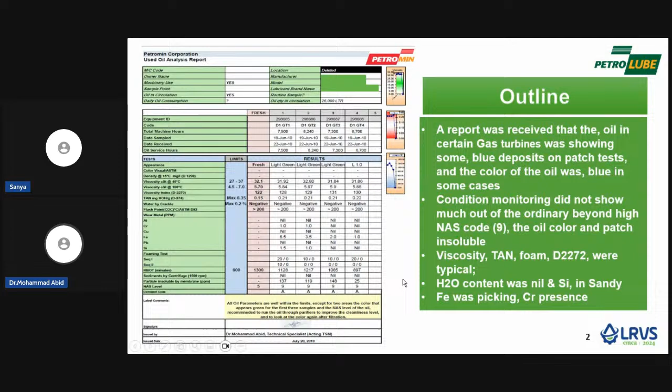We found the reason for this blue color. Initially, I thought this bluish tint was due to copper or something, but there was no copper in the solution. You can see some of the internal parts of that turbine, how it looked at that time.

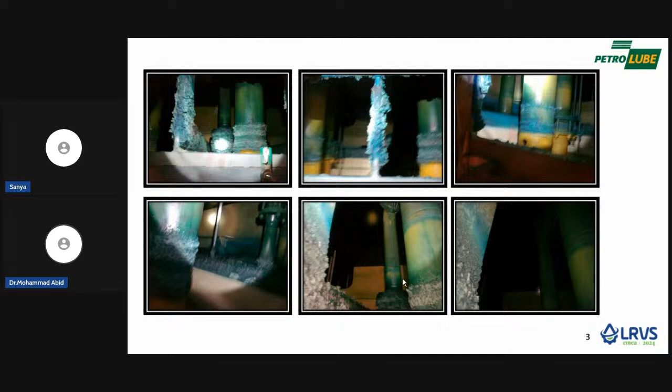It was mid-2010 in one of the biggest power plants in the central region. We worked on this along with General Electric. Since all this data I'm presenting is based on trust, it is not patented or our property, but it is a joint effort, and we achieved something at the end. So I'm sharing with the audience how, if we do a systematic analysis of a customer complaint, we can gain some beneficial insight.

Here you can see the problem: the turbine received gradual losses of pressure in the hydraulic system. All the valves got choked and some pressure issues came up.

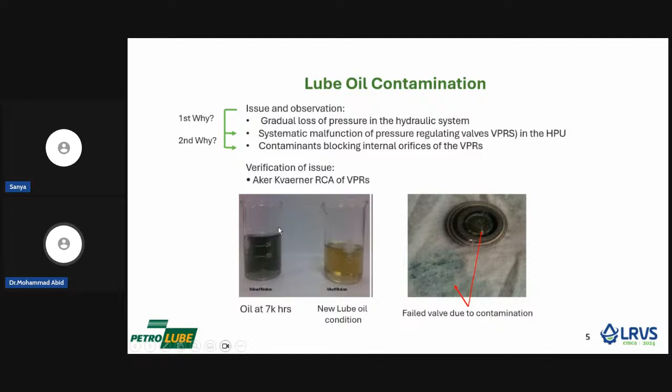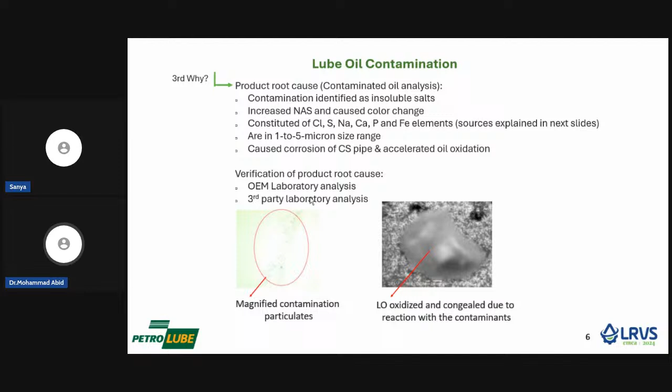In this slide, you can see the supplied oil color, which is the new lube oil color, and at 7,000 hours, something like 10 to 12 months of operation, the oil turned bluish. We took some high-tech analytical chemistry help to analyze the varnish or sludge particles, and the root cause was a contaminated gel, a hydrocarbon product formed due to varnishing.

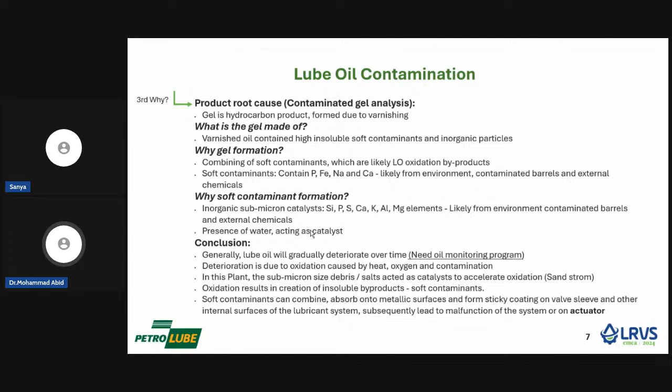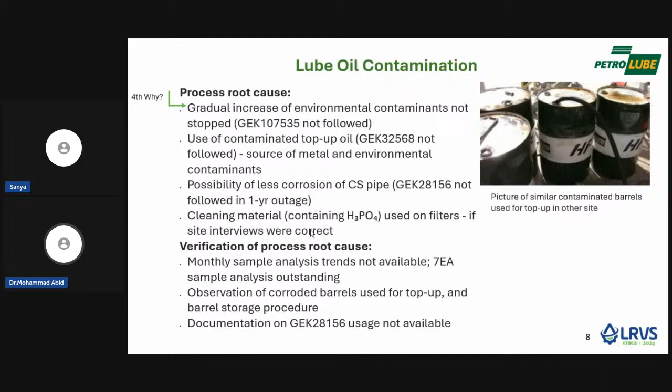I will not go into all the details, you can have them in the slide pack after this presentation. We are again the first company producing Group 3 base oil since 2006. We started importing Group 3 base oil from S-Oil, which was partly owned by Saudi Aramco at that time in 2005-2006, and is now 100% owned by Saudi Aramco, with the refinery in Onsan port, South Korea. We are the first to produce high-level turbine oil within the Kingdom of Saudi Arabia since 2006.

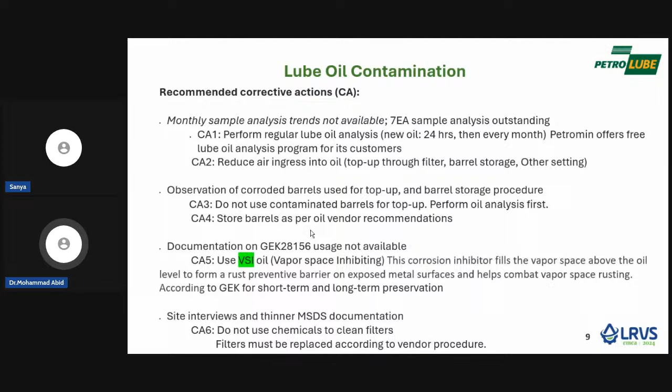In this presentation, we are mainly suggesting corrective action and preventive action due to an unwanted issue which happened. We had a total investigation of 125 bullet points, but I just captured 25 here. Out of that, the used oil monitoring and its interpretation is the key to this success story.

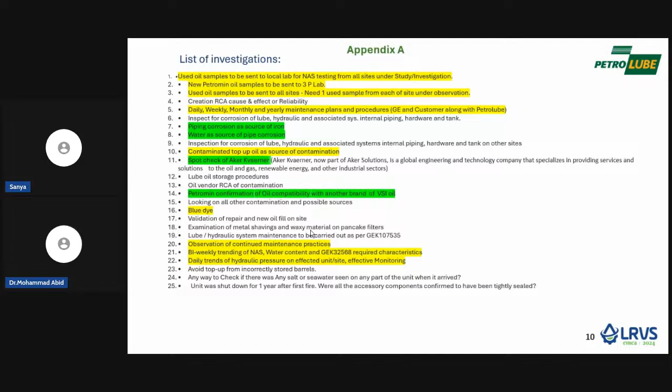One of the main issues in this subject was a bluish color. We were asked to help identify the cause of the problem. We had never heard of this problem except in a case with an Alstom turbine, a 400 megawatt steam turbine here in the western region, where we had blue issues in the turbine oil color, which I can show you at the end of the slide. But that blue was due to a different reason for the oil's color.

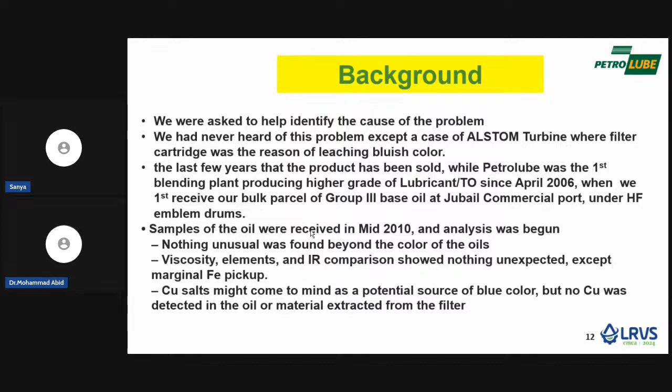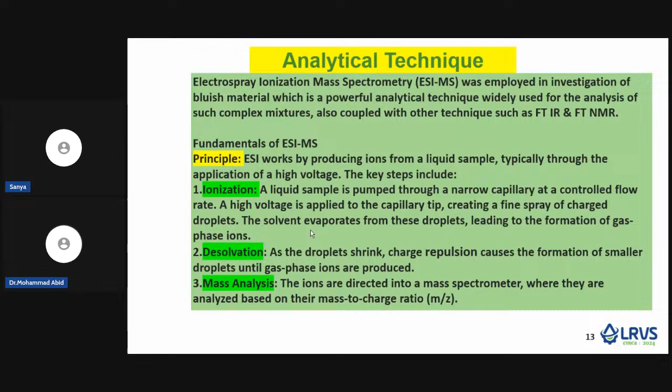In the last slide, we analyzed the fine particles using electrospray ionization mass spectrometer, and also used FTIR and Fourier transform nuclear magnetic resonance spectroscopy to characterize the structure elucidation of this organic compound, which was formed inside the turbine due to weak acid remaining. We found that often the big equipment is cleaned at a pre-commissioning stage, commissioning stage, or hydro testing stage with chemical cleaning.

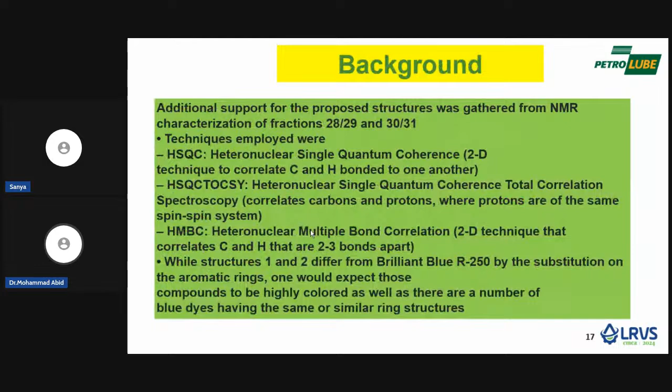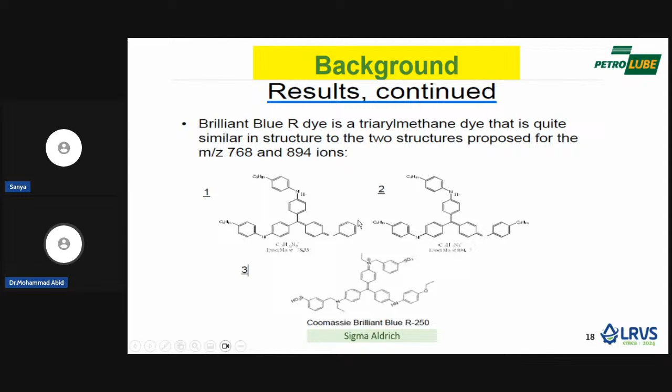Often oxalic acid, succinic acid, or some other weak acid is being utilized. So we were able to develop some compound in the lab, and this is the top two structures. You can see what we were able to understand - this Coomassie Brilliant Blue dye is produced by Sigma Aldrich. People with a strong chemistry background know this dye is available in the commercial market. What had happened is that due to that weak acid and some of the antioxidant in the oil, it formed a similar molecule which shows the blue color.

Alkylated diphenylamine are commonly used as antioxidant because we were using a chemistry at that time based on Lubrizol's different package. You can see here that diphenylamine, when reacting with oxalic acid, produces some structure which was in the blue color. So we were able to find the root cause through this dedicated study.

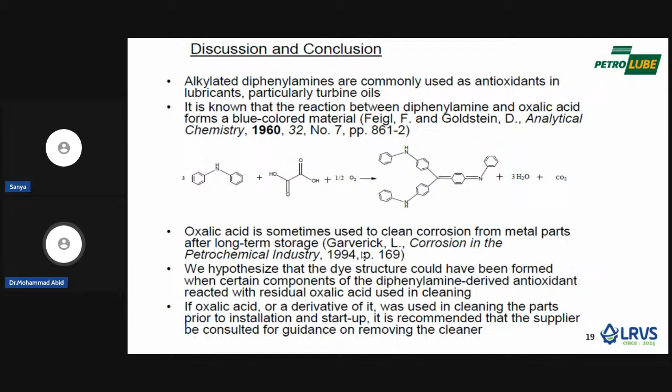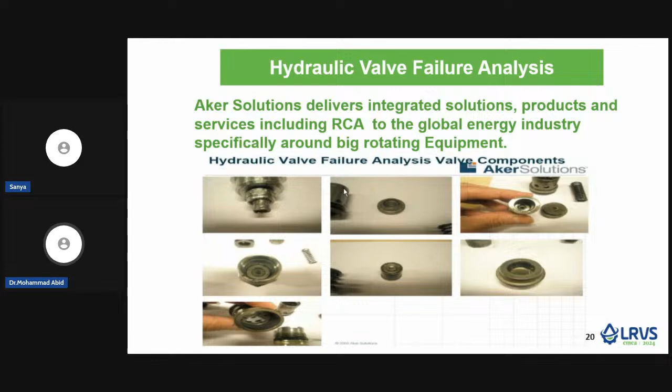We also engaged one of the companies which is providing a very specific solution for mechanical integrity - Aker Solutions delivering integrated solution products and services including root cause analysis. It is all mechanical, I am not involved in this thing, but the whole study had two sides: one is the chemical investigation, where I was directly involved, and the mechanical investigation.

The problem statement: the affected site reported a hydraulic pressure unit problem due to a suspected issue with a sun cartridge valve. All these fine blue varnish particles were the reason for malfunctioning of this gadget. In conclusion, contamination was undoubtedly the source of failure of these hydraulic valves. Foreign contaminants restricted the orifice and interfered with the flow mechanics, preventing the valve from proper operation.

Here I would like to tell only one thing - this is a conventional base, but nowadays artificial intelligence has come in. Not a similar issue, but we were also selling this oil to the military.

When we supplied the oil to this turbine, it was NAS 5, 6. Over time, when we received the sample after 10 or 12 months, the NAS had reached 9 and 10. So we concluded that we need short interval turbine oil monitoring, rather than waiting for a long term before this deterioration happens.

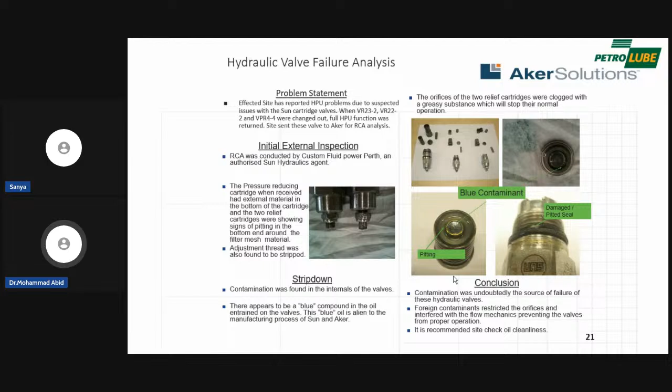In the combined military workshop where we had the simulator, we found an instrument that was broken, with a small particle from the wear metal. One can also find which source this metal is from, which part - whether it's from a bearing, a shaft, or something else. Nowadays the analytical technique is far more advanced, which can help in the instrument operation.

But nowadays, thanks to the instrument we had from Flutech - I would like to thank Flutech for this seminar also - we are now regularly monitoring our remaining antioxidant in our supply turbine oil for the sites, and we can gauge the situation at a much more advanced stage.

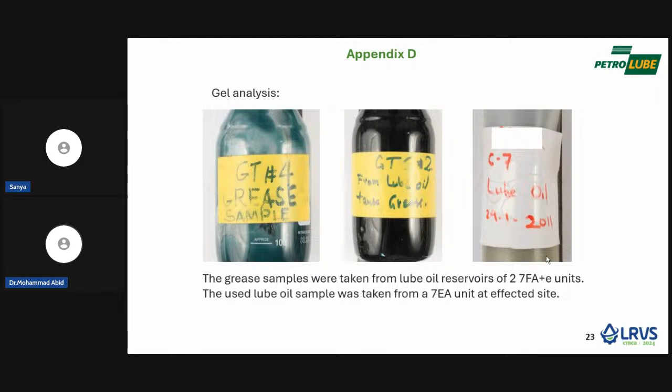This slide shows this greasy, gooey type material from the turbine filters. You can see the left side is green, and the lube oil supplied had a fairly color of less than 0.5 as per ASTM D1500.

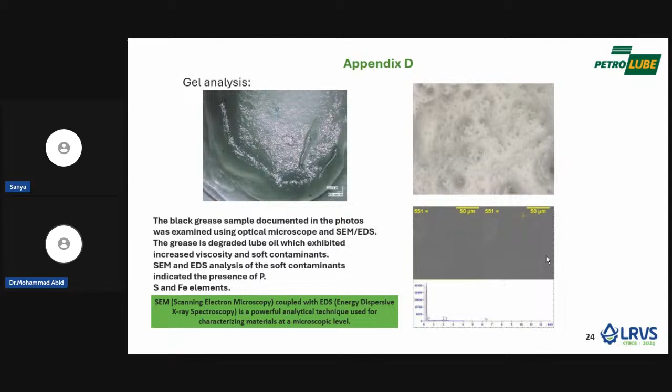This slide shows again some scanning electron microscope imaging, which we carried out in the US for this study, which again proved what happened in the oil due to some misoperation.

In the last second line, the resulting loss of power was primarily due to the deposition of the pigment and the insoluble salt, aided by the gel's ability to allow the mixture to be entrapped on the valve, pressure regulator orifice, stick on valve sleeves and other surfaces, leading to system malfunction.

We have also found that ill practices and non-compliance with procedures specific to GEK's reference maintenance program was not followed unfortunately. So it was also the reason, which I mentioned earlier.

The blue color was formed due to the weak acid and antioxidant reaction, which only proves how this blue color is achieved or formed.

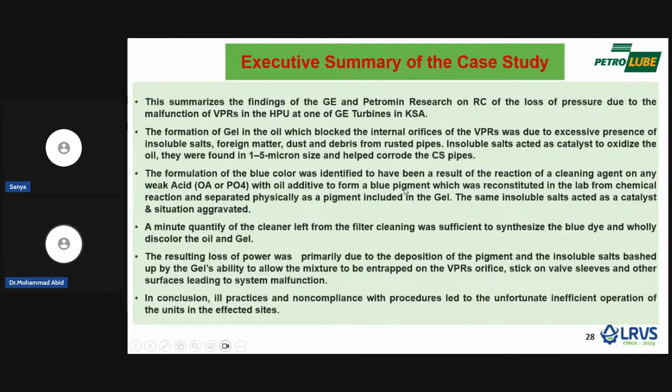So in conclusion, turbine oil monitoring has three parts. Oil condition is one part. Often people are only doing this thing: viscosity, RPVOT, VI, TAN, demulsibility, foaming, air release value, flash point, pour point. But oil cleanliness is greatly affecting performance. In the last two decades, research papers published on this say that 85% of malfunctioning in any big rotating equipment is due to contamination or oil cleanliness, which can also be checked.

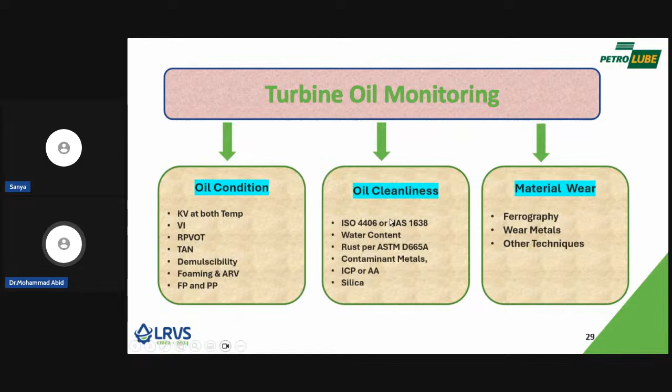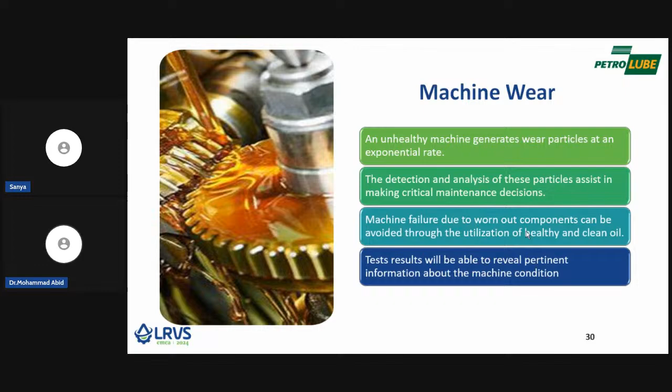Material wear is the third part, which is also important to monitor. A healthy machine generates wear particles at a linear rate, since the oil has a finite life, giving a linear relation for machine wear. But if something goes wrong, then wear starts increasing exponentially, rapidly, like a parabola or hyperbola.

So the method of monitoring is laboratory analysis, which we are doing in our Riyadh plant and Jeddah plant. We are operating three plants, by the way. One plant is in Jebel Ali, Dubai, one is in Jeddah, and one is in Riyadh.

And we do have a mobile lab within the kingdom. One is in the eastern region, one is in the central region, one is in the western region, to support critical customers for all B2B, where our mobile lab has some instruments and we immediately rush to the site where this problem is, and then we send back the sample to our stationary lab.

This is one of the second last slides. You can see this is the Alstom, but I did not focus on this. Here again, you see on the left side, our oil was like this. This is the story in year 2006 or 2007.

Our oil, after certain hours, maybe 6,000 to 7,000 hours, turned bluish. When I visited with my team at that time, we immediately found the culprit was in the bucket-type cartridge filter. These plastics or something on the filter were the reason for the blue color.

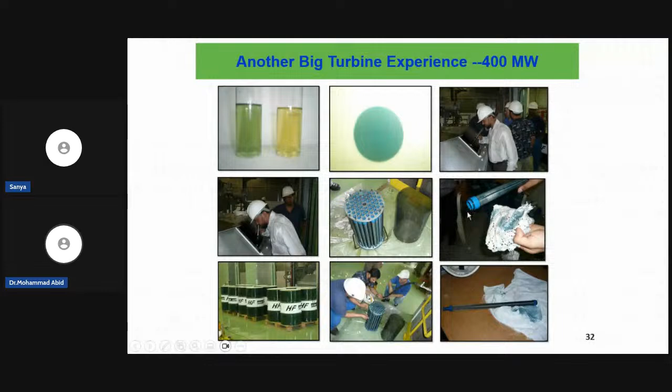The blue color was leaching from there, and then we explained this to the people from Alstom for this turbine, and we addressed the issue because the total acid number in the turbine oil, due to this antioxidant, is sometimes 0.1 to 0.15, so it might affect the plastics. So it was good input for the manufacturer also, and they revised the specs of the cartridge.

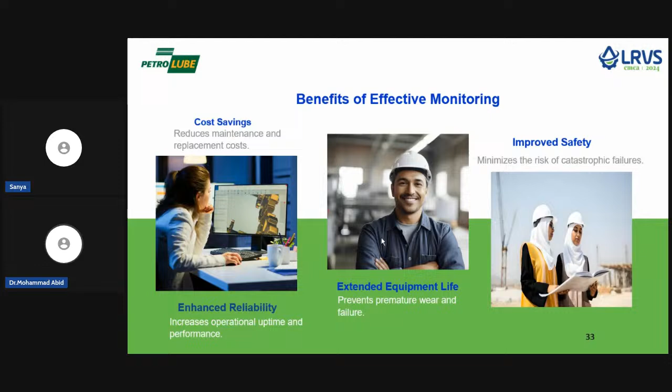With this, I'm just presenting that professional and dedicated used oil monitoring will enhance and help everything. And not only safety, it extends the equipment life, reliability is greatly affected, and it saves cost.

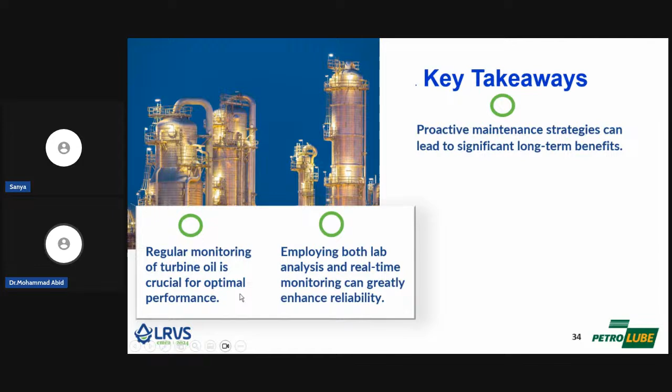So this is the takeaway point for the attendees. Proactive maintenance strategies can lead to significant long-term benefits. Employing both lab analysis and real-time monitoring can greatly enhance reliability. Regular monitoring of turbine oil is crucial for optimal performance.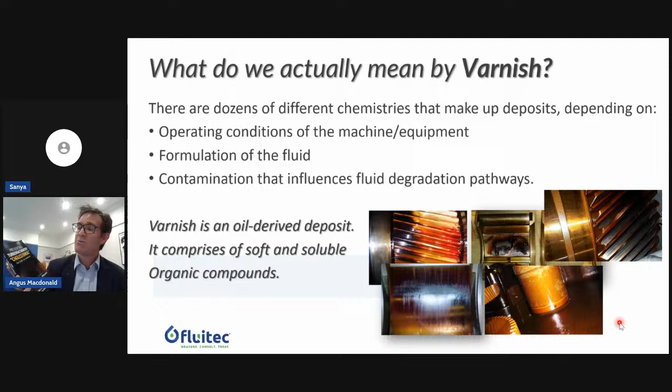As you can see with some of these images here, taken from a variety of applications around the world, it tends to be a kind of brown, orangey, sticky substance you can see on these gears, on bearings and in these reservoirs. But if you want to know more and understand more about varnish, there's a fantastic book published last year, 'Preventing Turbo Machinery Cholesterol, The Story of Varnish.' It's got absolutely everything you need to know about this subject.

In terms of the benefits of being ahead of the varnish problem, it certainly pays off over time. We've got a couple of snapshot examples of just how significantly varnish can impact businesses.

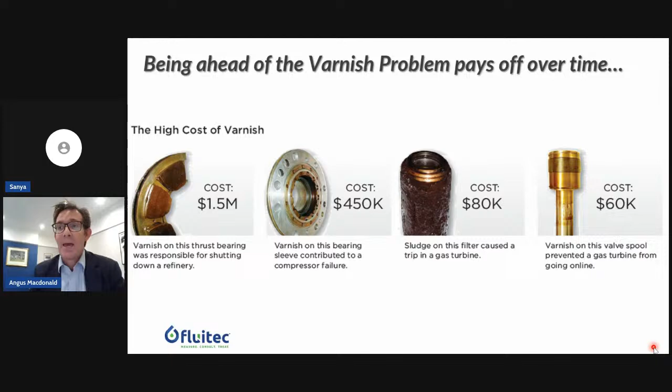So starting on the left, $1.5 million - that was varnish on a thrust bearing that shut down an oil refinery. Nearly $500,000, again varnish on a bearing, which contributed to a compressor failure. This time, sludge on a filter which caused a gas turbine to trip out. And then finally, even up to $60,000 for varnish on a valve spool that prevented a gas turbine from going online. So it really can have significant impacts on maintenance and operating costs for a variety of applications.

So a bit of background about what Fluitec does as a business. They have a synergistic suite of products which align with the Fill for Life concept.

There are four main areas. Firstly, the expertise, which includes LRVS, where we are today, in fluid learning. Secondly, and really importantly, is condition monitoring. The Fluitec team helped develop a number of key ASTM tests, a couple of which I will discuss in more detail today, including the MPC and the RULER. Dr. Abid mentioned the RULER in his last presentation, and they were designed to help monitor in-service lubricants, whether it's turbine oils, hydraulic oils, gear oils, etc.

Thirdly, Fluitec also developed a range of solutions for contamination control, which focus specifically on filtration that can safely remove varnish, using a unique, innovative gel resin type technology to help decontaminate systems. That's the Vita ESP. And then finally, and most recently, a range of life extension products, technologies used to flush or remove varnish, as well as re-additize and rebalance in-service lubricants, which could be turbine oils, hydraulic fluids, compressor oils, or even gear oils.

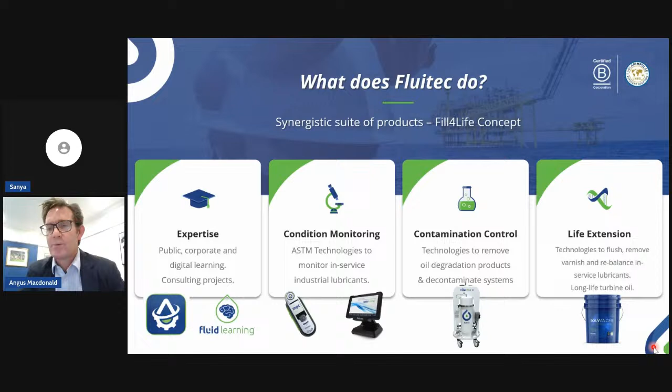So in this morning's presentation, I mentioned five case studies. What I wanted to highlight was the range of different industries and sectors, from power generation to plastics, offshore oil and gas, and even an oil refinery. The applications include gas turbines, blow molding machines, and air compressors. The lubricants understandably vary depending on the application, but include turbine oils and hydraulic lubricants.

The main problems we're going to look at involve high varnish potential and the subsequent issues it causes, including high bearing temperatures and really expensive downtime. Finally, on each of the case studies, we'll take a look at the solutions we implemented to help solve those problems, including both the MPC analysis, the ASTM D7843, the Decon Solvancer, and a couple of other products.

To kick off the first case study, a company called Innovia. They're a global business with an operation in the UK, but also elsewhere - Australia, Germany, and Poland. Just over a year ago, Innovia contacted us directly due to some issues they were suffering with their Solar Taurus 70 gas turbine, which has 2,000 litres of turbine oil in it. The main issue they were suffering from was elevated bearing temperatures.

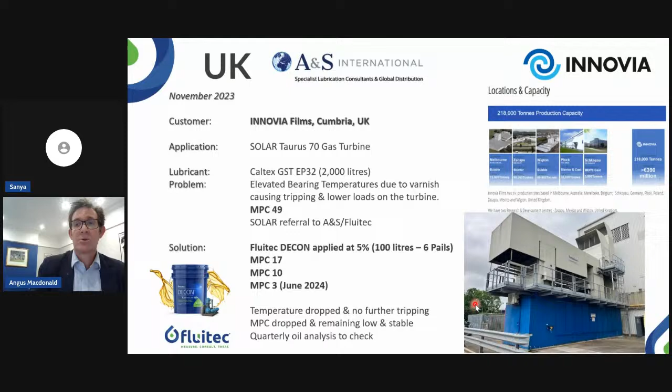As you can also see here, the MPC started to steadily drop and decline, and continued to remain low and stable. The team, with our recommendation, have continued with quarterly oil analysis to verify the continued stability and low level of the varnish.

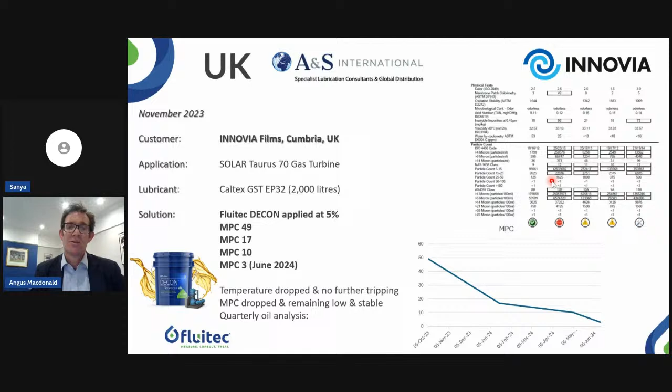We've graphed this, and you can see how the MPC value has steadily dropped over the last 6 months. Back in June, the MPC dropped down to a 3, a very happy customer. It meant they didn't have significant downtime from having to drain out 2,000 litres of turbine oil. Just by adding 5% of Decon, they solved the issue of elevated temperatures, and here we are nearly a year later with no further issues.

Secondly, we move away from turbines and onto blow moulding machines and the plastics industry. This business, Vacsax, in the southwest of the UK, had issues with the hydraulic oil in these blow moulding machines. They visually identified what they found out to be varnish in their reservoirs. X certainly marks the spot. You can see here, in one of the hydraulic reservoirs, huge amounts of sticky varnish.

They took some oil analysis, and the MPC wasn't significant, but they also saw sticking valves and elevated operating temperatures. Based on all that information, the discussions we had, and the oil analysis, our best recommendation was the use of Fluitec Decon, again at a 5% mix ratio, which was about 3 pails of product.

Almost immediately, they saw a good drop in the MPC. More significantly, a couple of months later, when they were able to visually inspect the reservoirs, they were completely clean versus what they had before. For this business, the important element was avoiding expensive downtime and avoiding having to invest in a large amount of new hydraulic oil for their machines.

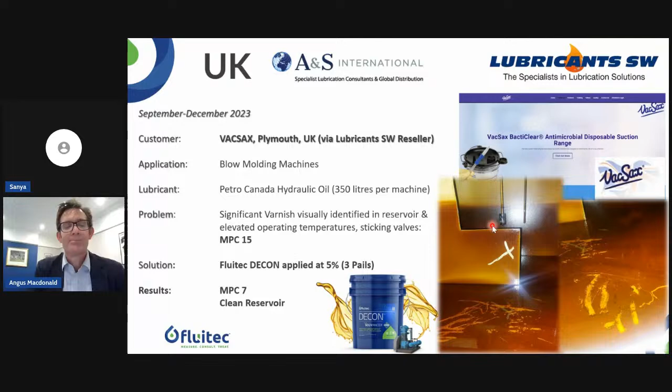Next up, a different scale altogether: a UK oil refinery. Just over a year ago, this organisation approached us regarding contamination issues they had identified with their GE gas turbine. Due to the oil analysis program they had in place, they understood they had contamination issues. The oil itself was nearing the end of its useful life, and they wanted a solution that would effectively clean out the turbine properly when they drained the oil, so they had a clean system when they added the new turbine oil.

It became clear to us that a good option would be Fluitec Decon, added at a 5% treat ratio, but in a slightly different way from the other case studies - used as an actual specific flushing product. They added 2 drums of Decon to the total product for about 2 to 3 months prior to the organised shutdown of the turbine, which is when they then drained out the oil.

We knew the Decon would have done a great job helping to solubilize the varnish on the internal components, meaning the varnish was removed when the oil was drained out, and meaning the new oil had a much better chance of long life without any inbuilt contamination. Next steps for the client are to introduce Decon to the new turbine oil to help prevent future varnish contamination - that's the beauty of a product like Decon. It can be left in the oil, it will prevent any future deposits, and we can back that up with regular oil analysis, including MPC, to check the value remains low and stable. It can stay in the oil for the life of the turbine oil with no problem at all.

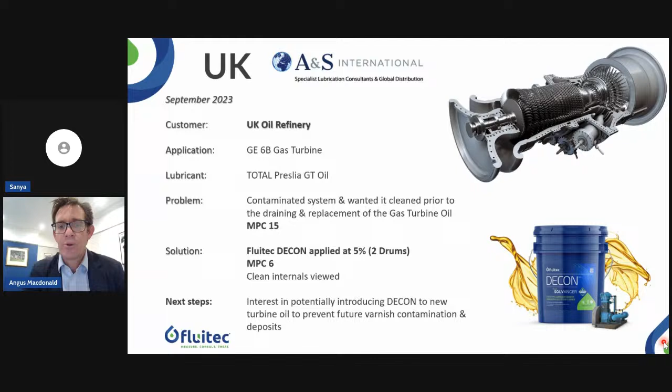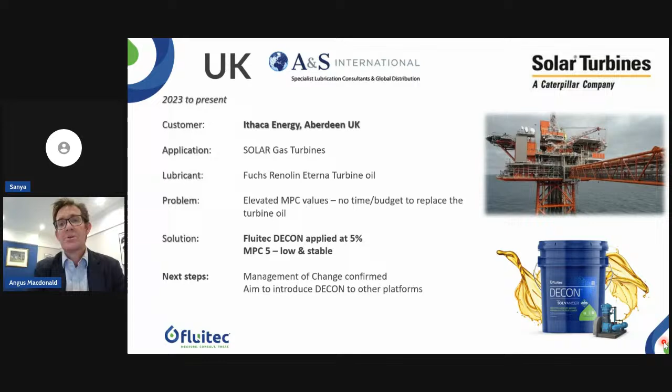The business implemented a management of change, and the next step is ideally to introduce the use of decon to other platforms and other rotating equipment that might be suffering from varnish as well.

In terms of next steps, other solutions discussed include the Vita ESP V100 filter units. These are relatively new in the last year, developed by Fluitec in conjunction with Solar Turbines. They're proving popular with the offshore oil and gas industry because they can be safely integrated into the turbine's or equipment's lube oil system, with no need for additional power, which can be a big issue for platforms introducing a new solution if they have to find new power sources. So this is something they're looking very closely at.

As I mentioned briefly at the beginning, the Vita ESP is a unique gel resin technology designed specifically for removing varnish. In this case, they've already helped solubilize the varnish from the internal components - it's in the oil - but once we implement the Vita ESP, these filtration units will strip the varnish from that oil quite safely.

Secondly, for some of the other applications, due to oil analysis results, by using the Ruler technology that Dr. Abid mentioned, we've identified that antioxidant additive packages are a bit depleted in some of those oils. So we're also looking at the possibility of using Decon AO, which stands for Decon Antioxidant. Through careful consideration and measuring, we can replenish those antioxidant additive packages for the turbine oil, meaning we can safely extend the life of that oil and it doesn't have to be drained out and replaced, which would lead to expensive downtime for these platforms.

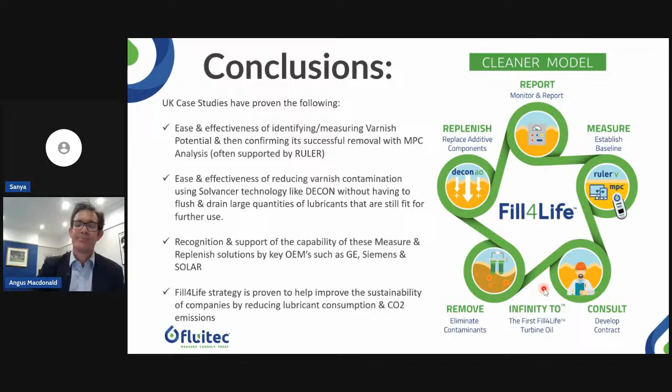All right, and I think we actually have quite a few questions. Angus, you did really well. Thank you so much for sharing that information. Very interesting to see what's going on in the UK, especially with all the sectors, offshore, power generation, all of these great things, and it's still being able to do a lot of things. So I'm gonna jump straight to your questions.

We actually had Mohammed asking what components need to be added to the product to minimize varnish. So I think he's probably talking about decon being added to the different products.

Yeah, so the decon is one product. It's a Group 5 base oil component. It's just a fluid, no capex required. It can simply be added to the reservoir. So there are no actual components as such, that's the Solvancer products. All the different decon products can simply be added to the reservoir, so it's a simple process. You gave him a really good answer there with the Solvancer products.

Thank you. Guillaume is saying thank you so much for your great presentation, and what do you think about depth media filtration? Oh, Guillaume, of course you're going to ask about the depth media filtration. Good question there, though.

Okay, thank you so much, Sanya. First of all, I would like to thank the organizers and attendees for their time. I'm really happy to be in this summit for the second time, and I'm looking forward to seeing this event grow with time. It is the right venue for the right people, it really makes distances close and shorter. Thank you so much, Sanya, for your preparation and coordination, this is really excellent.

All right, let me now, first of all, my name is Hadi Al-Qahtani. I am from Saudi Aramco. I don't know if you know much about the company, but Aramco is an oil company. We have thousands of machines, and we have thousands of lubrication systems for all different types of equipment, with all types of lubricants being used in our company.

Today I will talk about the use of AI in the lubrication business. And I think it's in line with what the gentleman Angus and Dr. Abid have presented so far. I see a very homogeneous theme between the subjects, although we did not coordinate with each other. But this is the topic of today: I will talk about AI and how it can transform machinery lubrication programs.

I will talk about some background and introduction. Then I will talk about the application of AI in lubrication. I will talk about monitoring, prediction of lube oil issues, then about failures and how to prevent them, capitalizing on existing programs, and also AI, which is the topic of today. I will talk about some challenges and benefits of having AI in the lubrication system. Then I will conclude with a summary at the end.

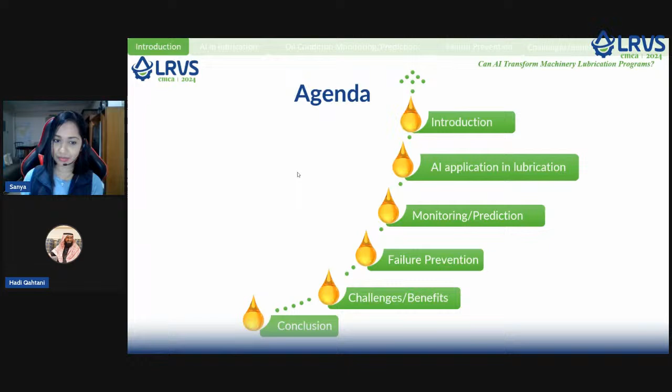The global AI in oil and gas market is expected to grow at 14.2% between last year and 2030. The big share of AI is going to be in predictive maintenance, which is the largest market share, representing about 35% of total market share.

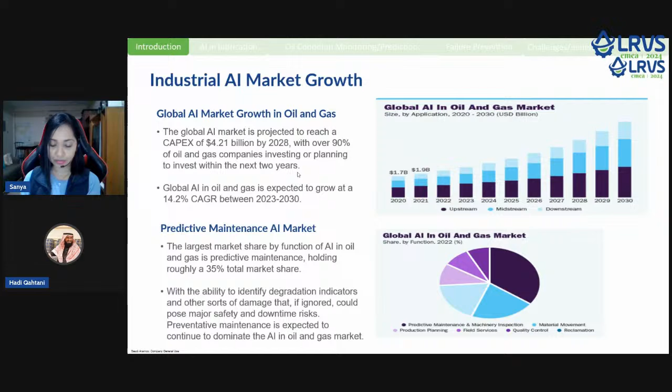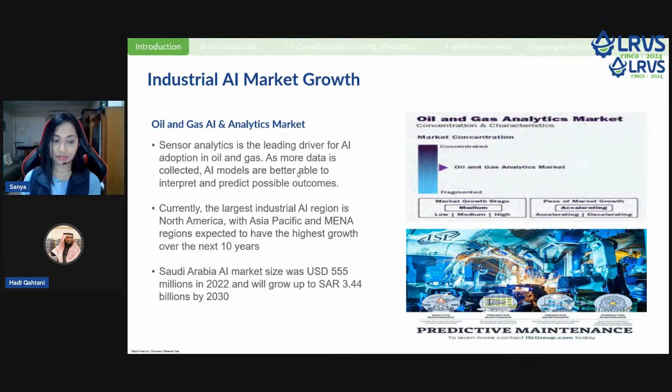Thank you, Sanya. The use of AI in lubrication is increasing with time, and is playing an increasing role in improving efficiency, prediction, and failure prevention in machinery. In fact, AI technology is already being used and applied in machinery lubrication systems.

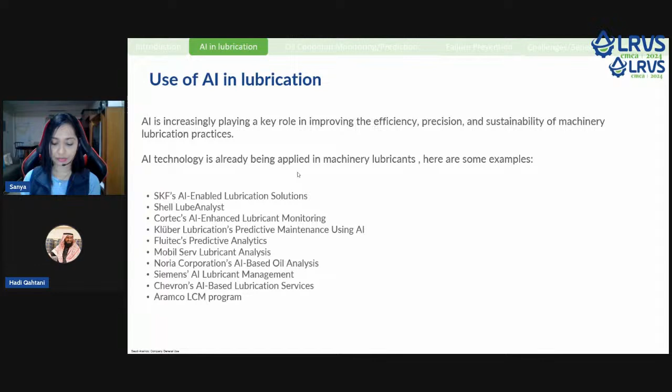A significant amount of time is spent by data professionals to analyze. Humans have some limitations, especially when dealing with massive and big data, and there is also possible slow decision making due to the massive data being collected and analyzed by humans.

On the other hand, AI-based analytic tools can analyze large data with minimum time, enabling timely and wider decision making. It accurately predicts anomalies better than humans because of the capability of these engines. AI-enabled dashboards also have the potential to respond dynamically to users with a personalized view.

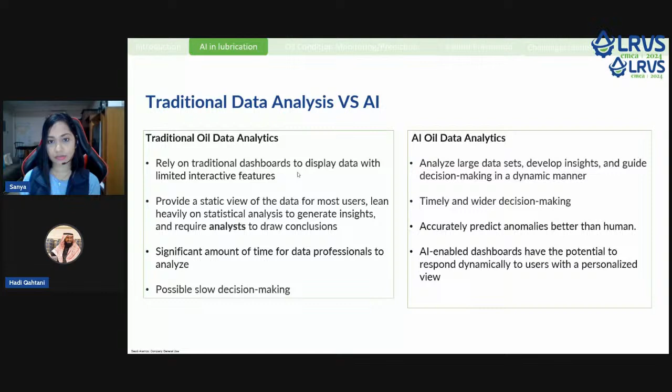In the next slide, you see the current lube oil analysis program. This is just a demonstration of what we have right now.

We have the equipment management, we have the scheduling of samples, then we collect oil sample, then we send it to lab for testing, and the results get reviewed by the analyst. Then we make a recommendation or corrective action, and we issue reports at a high level. In fact, this is what we have currently now.

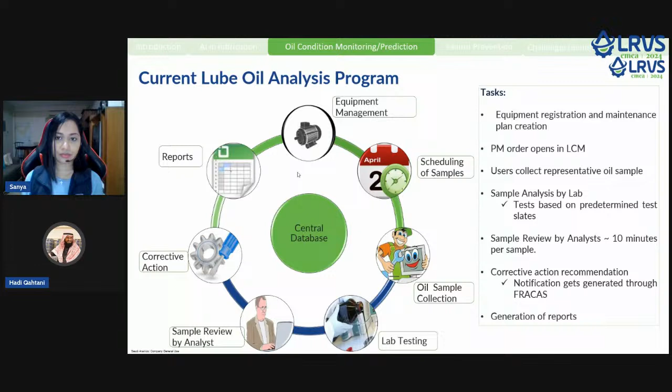I will show you in the next slide what we are going to have in addition to the current situation. Here we have the current way of handling lubrication. As you can see, the green arrow is the current one. However, with AI, you can see the blue arrow. This indicates the introduction of AI analytics.

So if you look from the left, we have the samples sent to the lab, get analyzed and reviewed by the lube analyst. Then it will be shared to the plant, whether we have compliant samples or non-compliant samples. By having the online sensor, there are sensors right now installed, but without AI, it just takes the measurements and tells you if you have water in the oil or contamination, and it will give an alarm.

However, the AI analytics tool in the middle will look into both the offline data or sampling data and also the data coming from the sensors, and it will make the analysis.

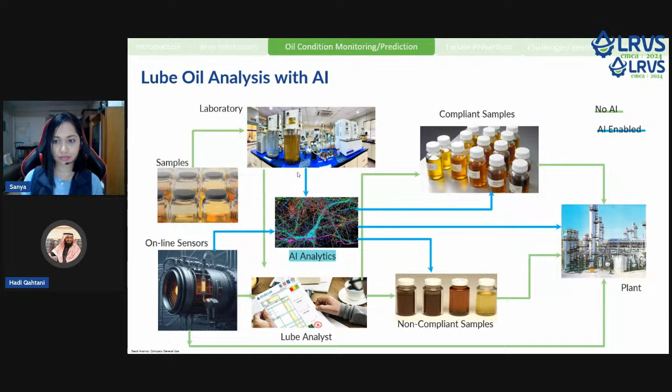Then it will tell you this is a good sample, this is a bad sample, and here is the recommendation based on the result. By the way, this methodology is applicable to all types of data. But since we're talking about oil here, I'm presenting the oil part of it.

The AI really can do a lot for us. It can help during the design of the formulation of the lube oil, help in development of friction materials, and it's also adding a lot of value for monitoring, diagnostics, and prediction. This is the focus of today's presentation.

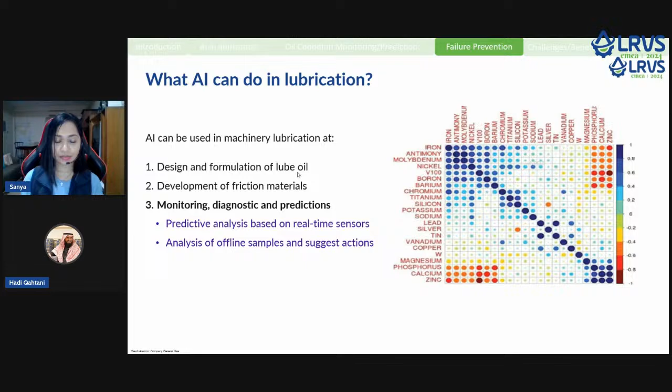I'm focusing on the prediction and diagnostics part based on AI. So it can predict and analyze based on real-time sensors, and it can also analyze offline samples and data and suggest actions.

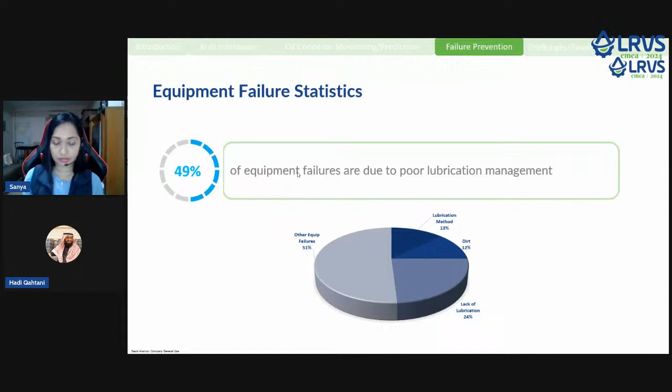Let me take you back to machinery failure and how AI can help in this aspect. As you know, some studies indicate that 49% of equipment failures are due to poor lubrication management. Knowing this, introducing AI can help minimize this number by having timely analysis, accurate prediction, and a heads-up before the failure takes place.

I believe AI can help with failure due to contamination, because we have proven sensors now in the market that can really predict contamination. It can also help with failures related to dissolved gases, since there are sensors now that can help. And for degradation failure mode, sensors can really help big time in predicting degradation early enough to prevent a failure.

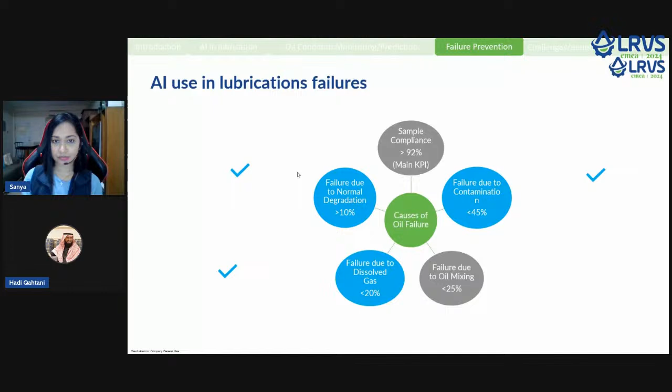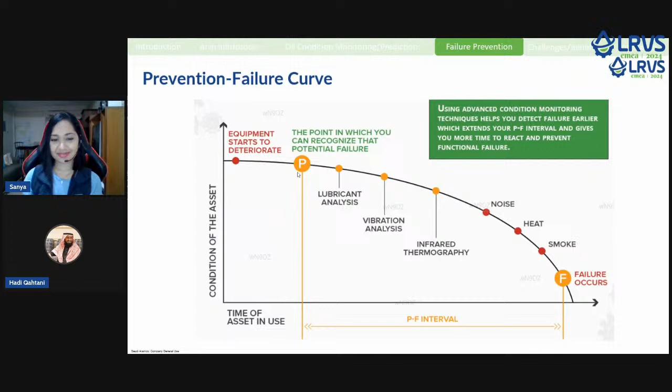So I'm expecting that AI lubricant analysis, if you call it that, will move detection even before the current dot on the curve - it will bring it forward. Next slide, please.

However, with all these promises and anticipated benefits of AI, there are some challenges we need to be careful of, like data quality and availability. Rubbish in, rubbish out - if you don't have good data, if the data are unavailable, you won't be able to use AI.

The second challenge is the integration of AI with existing systems. Each corporation has their own existing systems built over the years, and integration can be difficult - communicating with SAP or existing maintenance systems might not be easy. Careful review must be done before adopting AI.

Also, there's the cost, because it's not only about the AI engine - you need to have sensors. If you're looking for data analytics based on live data, you need people trained to learn new things about AI. This is something that needs to be considered.

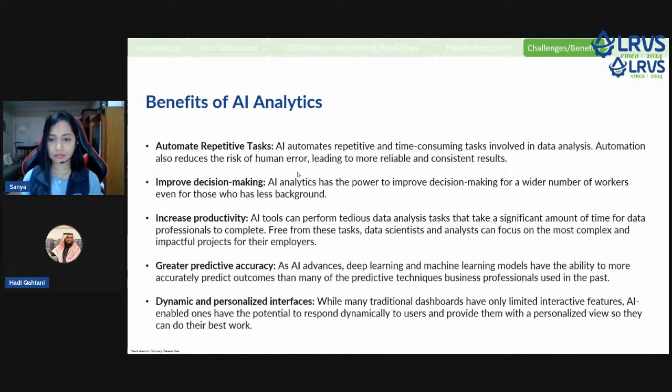It is providing a dynamic and personalized interface. The dashboards based on AI are more interactive, more dynamic. You can really have better reporting, better representation of your KPIs and data.

In conclusion, AI algorithms can analyze vast amounts of data to predict machinery health and reliability. That will help reliability engineers and analysts make better and informed decisions about machine condition. So again, this is proven - I have seen it myself in many installations, and the algorithms are getting improved with time.

AI in lubrication, condition monitoring, and prediction is expected to grow tremendously in the next few years for both offline data - reviewing sample data, especially if you have many installations and different types of oils - and of course for online data or sensors.

There are key considerations, some concerns I may have already shed light on: workforce education about AI is really something considered a point for review and for alerting our people. Also, the data-driven culture - data fuels AI algorithms. So invest in collecting and storing high-quality data across operations to facilitate effective AI implementation.